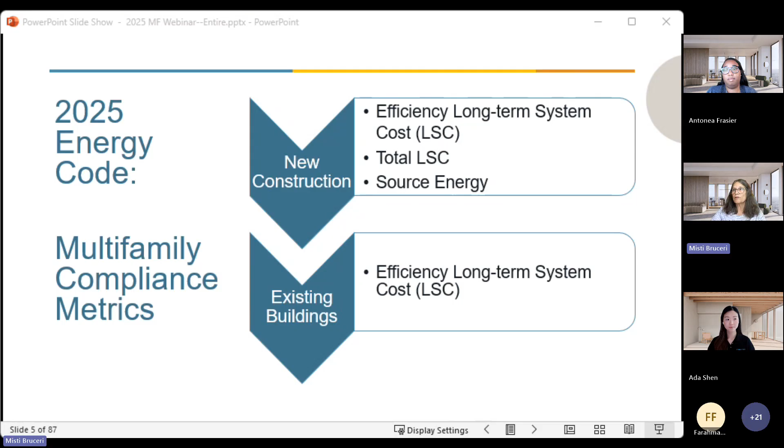I'm going to get started with a high-level review of some really basic information about the Energy Code, just to set the table for us and get us ready for the discussion. Just going to quickly cover the basics.

There are 3 metrics for new construction in the Energy Code this cycle. There were last time as well, but in this cycle we've switched the TDV metric to what is termed LSC, or the long-term system cost. That LSC metric is the CEC's projected value of the cost to the whole California energy system over about 30 years, so it's what we often term a societal cost. That's how the CEC looks at compliance and energy code development—they look at the whole societal cost, not just the cost to an individual.

For new construction, there are 3 metrics. 2 of them are the LSC. The LSC has 2 components. The first is the efficiency LSC, which basically covers the building envelope, the energy used to provide heating and cooling, water heating, lighting, and ventilation—all of those efficiency functions. The second component is the total LSC, which also includes the impacts from both PV and renewables, and any kind of demand response or demand management activities.

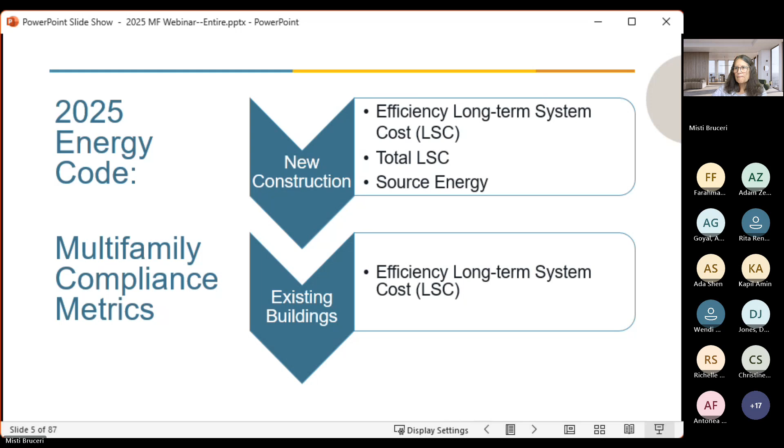When we do these analyses, we use prototype building designs. Those prototype designs are actually created by the DOE, and they are also used by the CEC when they set the state code requirements. So we use the same designs, and that helps us stay consistent with the compliance metrics and compliance structure.

For our study, both the new construction and alterations study use what the CEC terms a high-rise multifamily building. The CEC has a demarcation between low and high rise at 3 and 4 stories—3 stories and below is low rise, 4 and above is high rise. It's actually more like what would be considered a mid-rise building: a 6-story building, 5 stories above ground, 1 with non-res on the ground floor, and then 4 stories of residential.

For the low rise, we actually use 2 different prototypes. For the new construction, the low rise building is a 3-story design we call a loaded corridor design. What that really means is it's one big building and you enter your dwelling units from the interior—there are hallways with doors, kind of like a hotel.

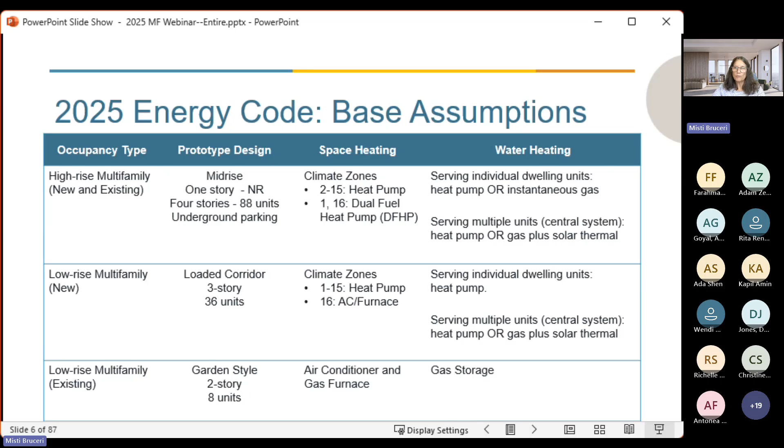We talk about this quite frequently, but the question does come up fairly regularly. A lot of folks are not used to dealing with the energy code - they may work with the building code in its entirety, but not the energy code. In order to amend the energy code, the amendment has to be cost effective, and so we do the studies to meet that legal requirement. That is the main reason we do the studies.

However, they're very valuable for a lot of other reasons. Even if it's not a legal requirement, it gives us an idea of where those opportunities are, what the options are, what might be some better pathways, and where we might run into some difficulties or challenges. It gives us much more information so that we can understand and communicate the potential impacts of one of these policies. It also helps us identify where opportunities might be available specifically locally that may not be available statewide, because we do the studies across the whole state in each climate zone. So it gives us a lot of different information that is really valuable as you're developing a policy. While they take a while and are fairly complex and a little tricky to get through, they are very valuable additions and good resources to use.

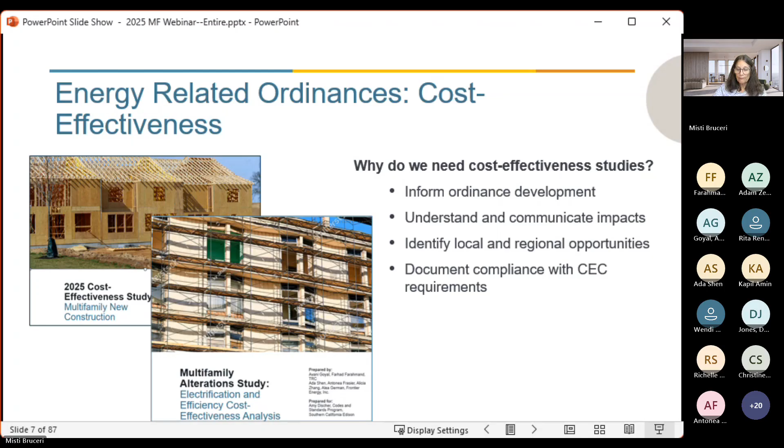With that, I'm going to turn things over to Ada Shen and Antonea Frasier from Frontier to give us a review of the analysis of the multifamily new construction.

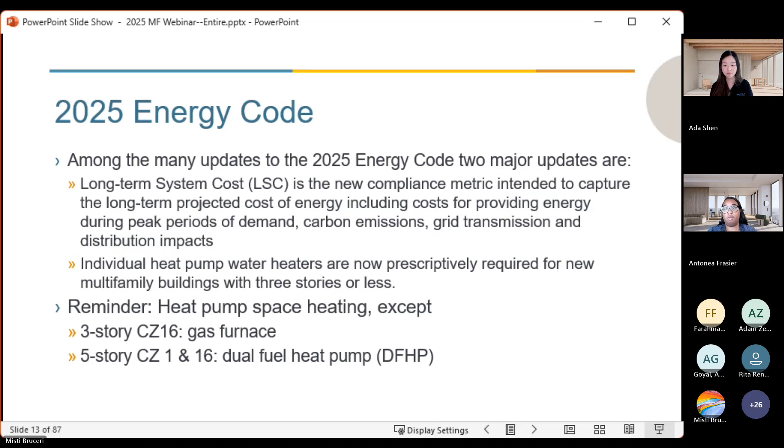Given this context of the energy code, we'll talk through our methodology for the cost effectiveness analysis. On a high level, this analysis builds on the 2022 REACH code analysis to provide continuity.

We'll be talking about two packages. First is what we're calling the electric heating package, referring to electric water heating and space heating where applicable. This is effectively an electric water heating measure in most climate zones, because the heat pump space heater is already prescriptively required except in climate zones 1 and 16, as described previously.

Second is the mixed fuel efficiency and increased solar thermal water heating package, which we'll describe in further detail later on. The team uses the 2025 prescriptive requirements as the starting point to set the baseline, and the analysis uses CBECC 2025 1.0 version, the compliance software for California. Cost effectiveness is evaluated over a 30-year analysis period.

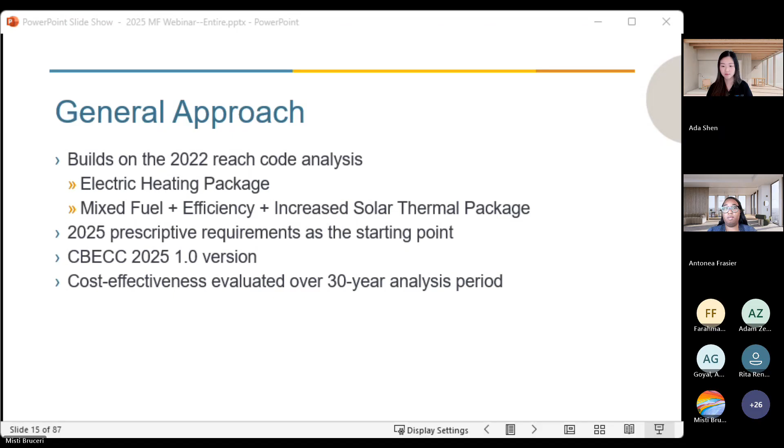Next, we have the two prototypes we'll be evaluating in this study: the 3-story loaded corridor and the 5-story mixed use prototype. Combined, these two prototypes are estimated to represent 91% of new multifamily construction in California. Though the 5-story includes commercial spaces, the energy savings and cost effectiveness in this analysis will only pertain to the residential portion of the building.

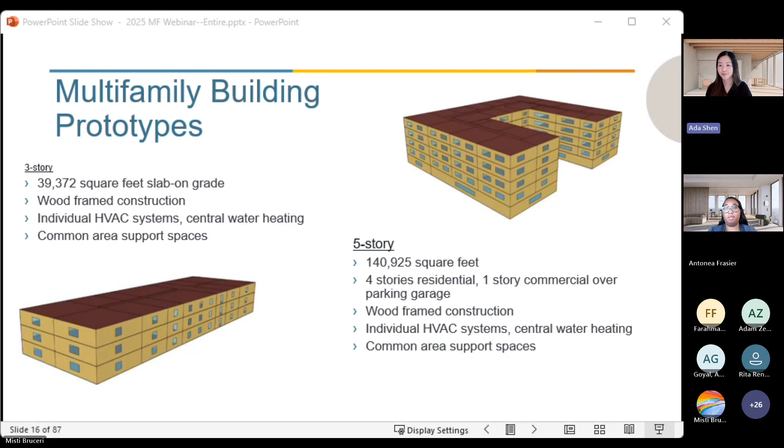Next slide. Our analysis baseline uses the 2025 prescriptive requirements. This is the heat pump space heater, except 3-story in climate zone 16, and in the 5-story climate zone 1 and 16, which uses a dual fuel heat pump.

We assume a gas central water heater with solar thermal. So buildings that install gas central water heating are also required to install solar thermal water heating systems, with 20% solar savings fraction in climate zones 1 through 9 and 35% solar savings fraction in climate zones 10 through 16.

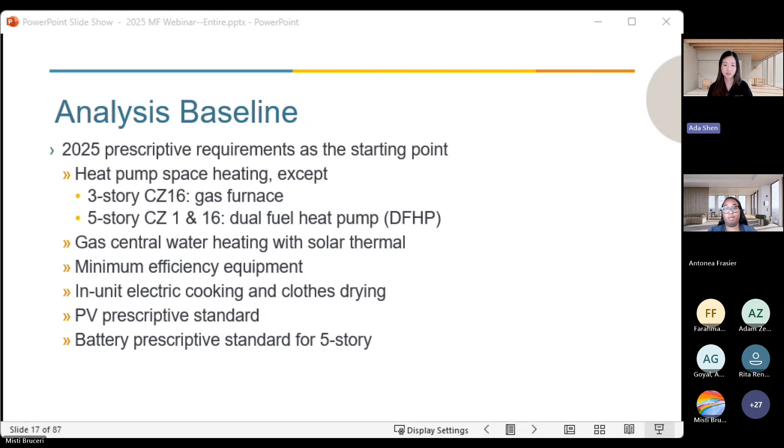The team assumes minimum efficiency equipment so as not to violate federal preemption, and assumes in-unit electric cooking and clothes drying. The prescriptive solar PV required, as well as the prescriptive battery for 5-story, is assumed in our analysis baseline.

Now we'll talk a little bit more in detail about these upgrade packages. First is electric heating, which is effectively a central heat pump water heater measure in most climate zones.

As mentioned, there's flexibility to install either a heat pump water heater or a gas water heating system, and the baseline will follow the proposed equipment. So, for example, if you install a central heat pump water heater, you're compared against a heat pump water heater and not the gas system.

In this measure, because the central heat pump water heater is not federally regulated, the proposed central heat pump water heater is higher efficiency equipment than the baseline heat pump water heater, which assumes fairly low efficiency. But to quantify cost effectiveness, we compare this measure to the gas system, in order to quantify the benefit of this measure in comparison to the gas system.

And for climate zones that do not have a heat pump space heater already prescriptively required, this package also includes the heat pump space heater. So in the table highlighted in red are the climate zones and prototypes where this would be an upgrade.

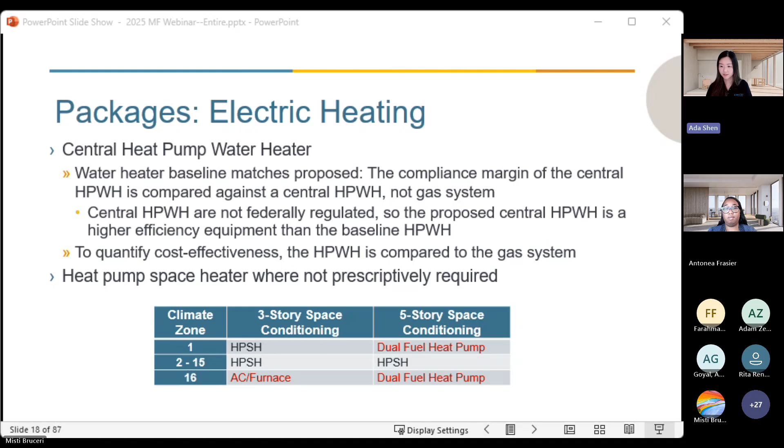Next slide. So the second package is mixed fuel with efficiency and increased solar thermal. In this table, we have the efficiency and solar thermal measures assumed for each climate zone. This includes a higher efficiency window measure, reducing the U factor from 0.28 to 0.24, verified low leakage ducts in conditioned space, and upsized solar thermal systems. You'll notice in climate zones 1 through 9 it's a 35% solar savings fraction system, and in 10 through 16 it's a 50% solar savings fraction solar thermal water heating system.

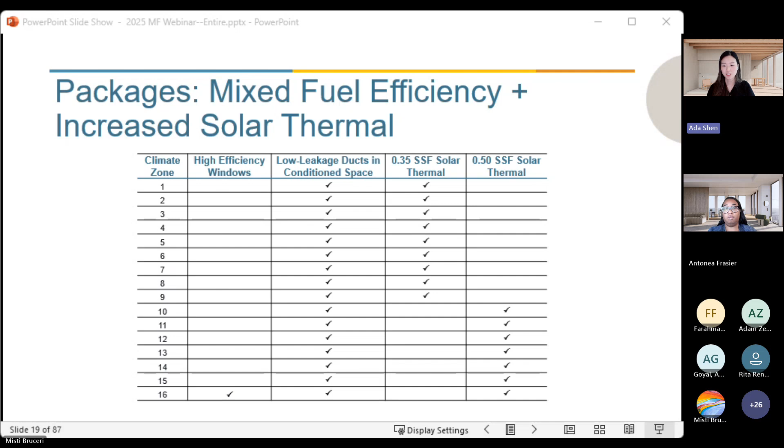Next, just some assumptions and caveats. The focus is on dwelling units and common area spaces only, so commercial spaces are not evaluated. The utility costs are based on residential rates, and the impacts are combined across all residential uses. So the energy use is from all the residential spaces. For example, the electricity will include the units and also the residential common area spaces. And utility costs are based on NEM 2.0.

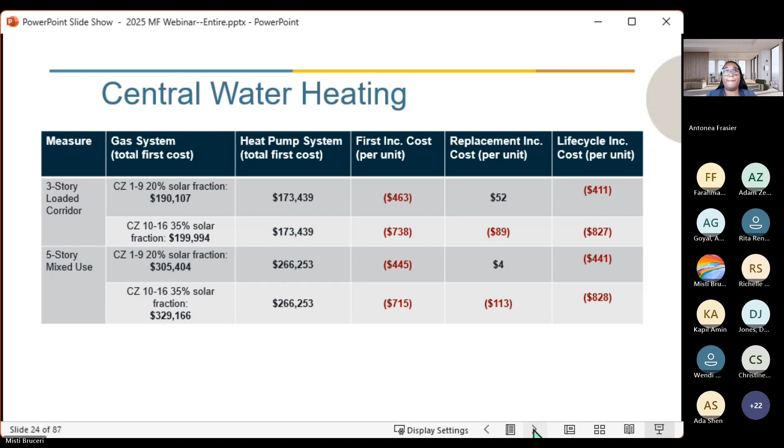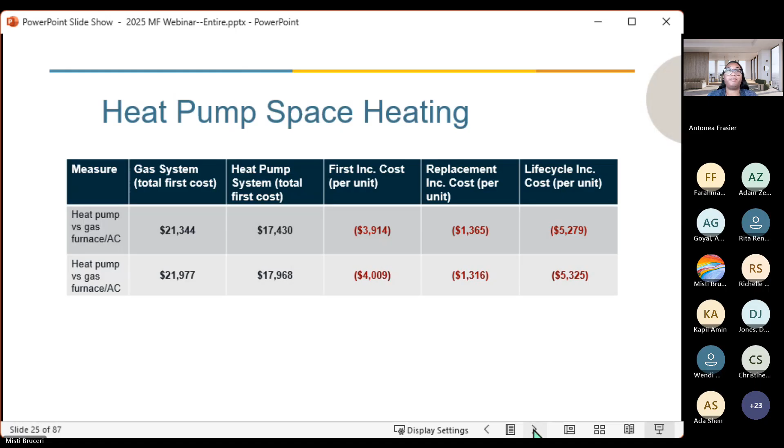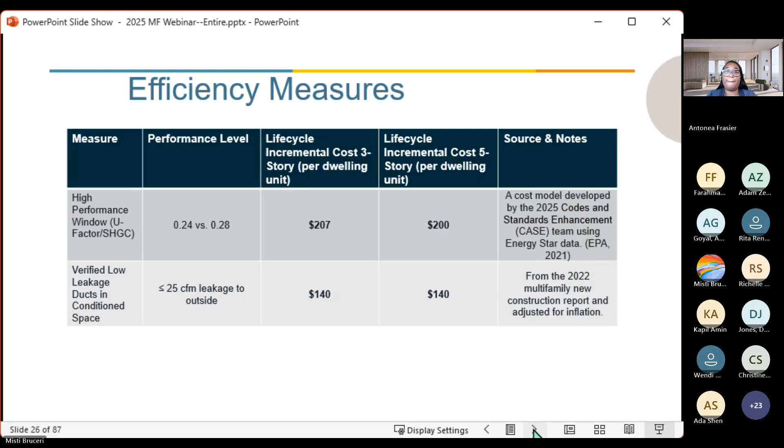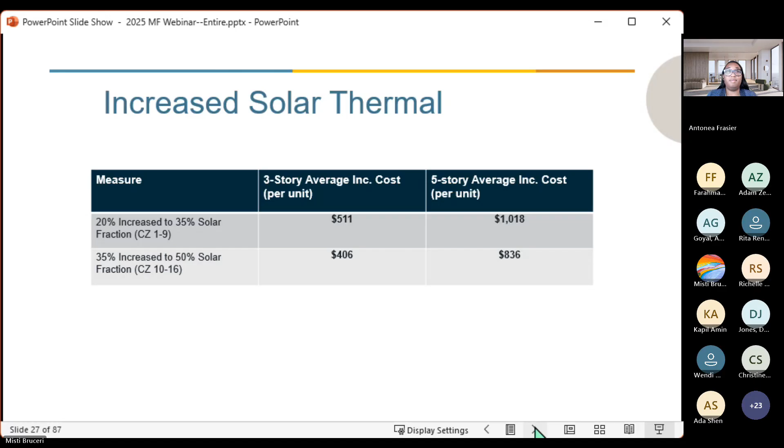Next, I'll move into the results and walk us through how each of these packages performed.

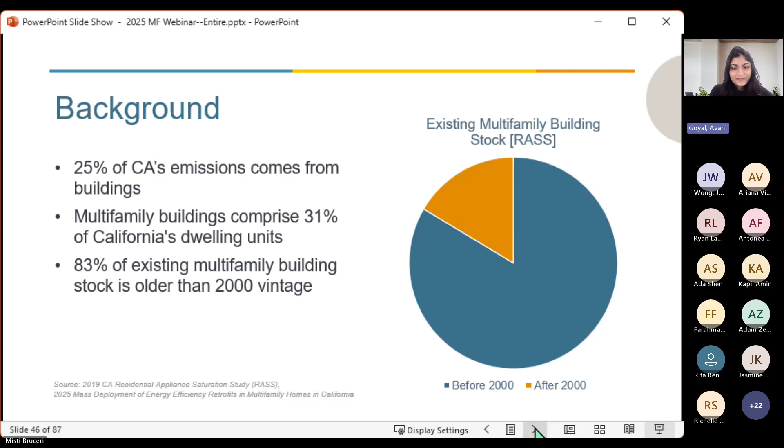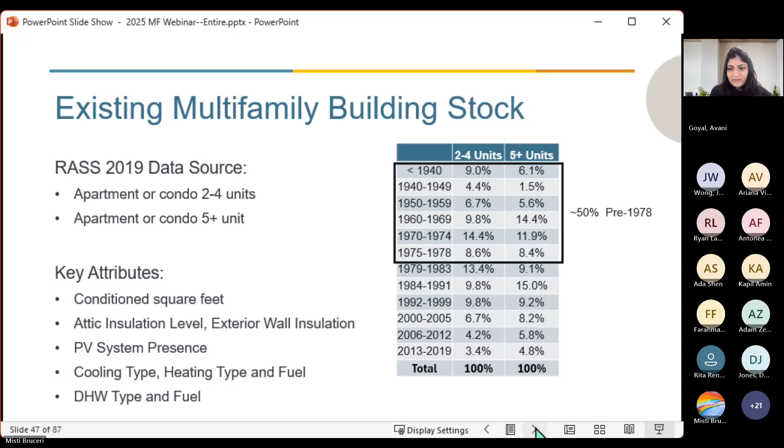There would be some retrofit turnovers that would have happened since then, but this is the as-built date. Key attributes that we evaluated as part of the building stock analysis were the size of the buildings, the dwelling units, attic insulation level, wall insulation, whether there is solar PV or not, the cooling systems, heating systems, the types, and the fuel categories, as well as for the water heating, what kind of systems and the fuel types they have. We'll later talk about how this data also informed which vintages we selected and why.

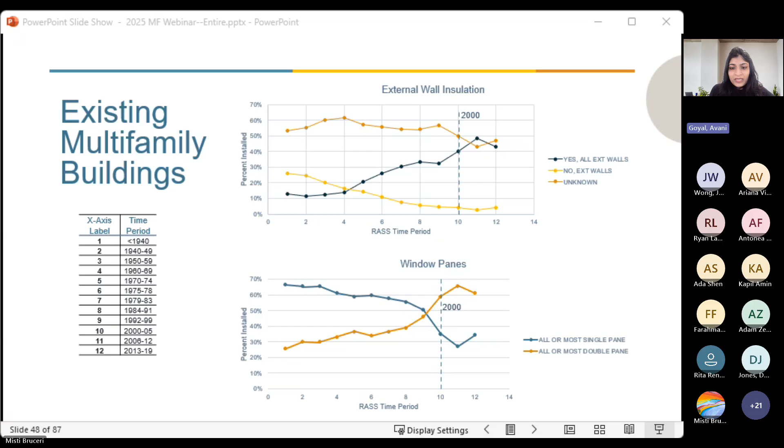Some key trends that we observed includes the first graph, which is wall insulation. It shows the trend over time, 0 to 12, going from the 1940s to the 2010s. As we can see, during the 1960s, which is number 4, external wall insulation begins to see rapid adoption, which keeps increasing, shown by the dark blue curve, which keeps continuing. And as of 2000, we can see that there is more insulation and much fewer buildings without one.

The second graph shows window types installed over time. The prevalence of single pane windows, shown in blue, declines over time, and the prevalence of double pane windows, shown in orange, shows a rapid increase, with the trend being reversed around and after the 2000s.

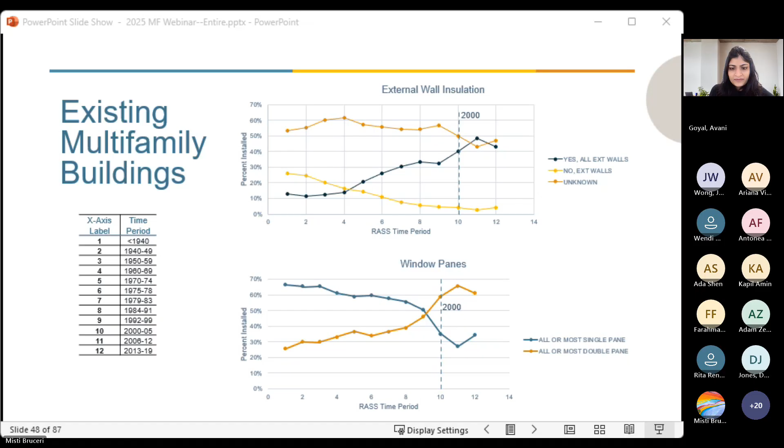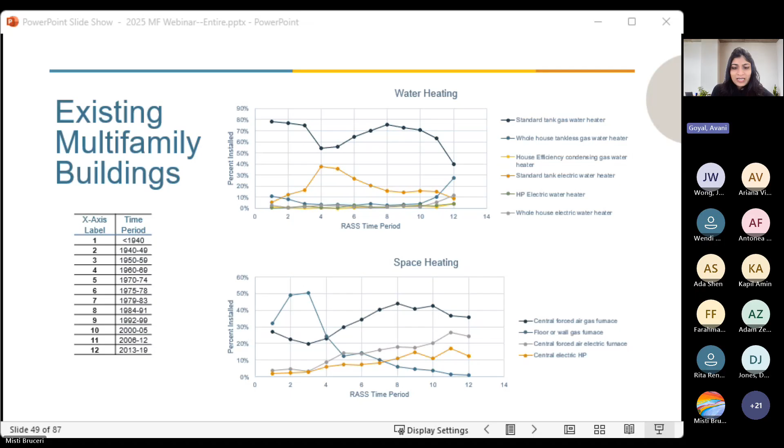The second graph talks about space heating equipment installations over time. Gas furnaces have the highest rate of installation for the majority of the recorded time periods, beginning in the 1970s, with floor or wall furnaces rising in popularity in the 1940s to 60s. However, we assume that even if they were installed in the 60s, they would have been replaced with a gas furnace by now. Therefore, the team assumed a gas furnace and AC in both the vintages selected for the analysis.

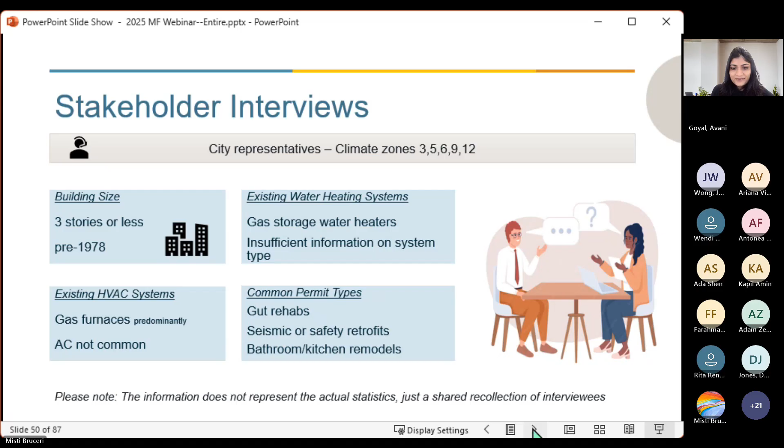I'll quickly talk about some of the barriers identified by the interview participants as it pertains to multifamily alterations. The cost effectiveness study has been scoped keeping these barriers in mind and trying to address them, especially the economic feasibility, where there is concern regarding increased retrofit costs, utility bills, and how it impacts cost effectiveness when incentives or federal credits are declining.

There is also limited awareness about the benefits, the GHG savings potential, or associated electrical upgrade requirements and permit requirements. The study also discusses some of the concerns related to technical feasibility, what it entails regarding concerns with limited space, accessibility, any electrical or plumbing updates required, or insufficient panel capacity.

There are other concerns reported related to code adoption, such as permit documentation, incentive availability, information, financing between tenant and owner, code development, and having enough resources, which would not be directly covered by the study but definitely kept in mind as we think through policy options.

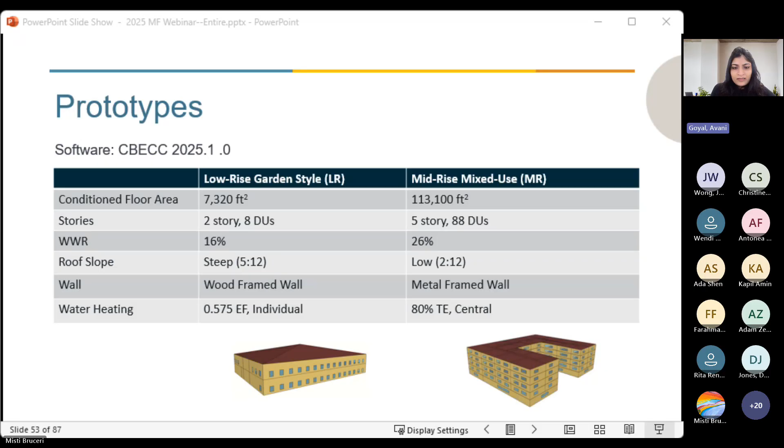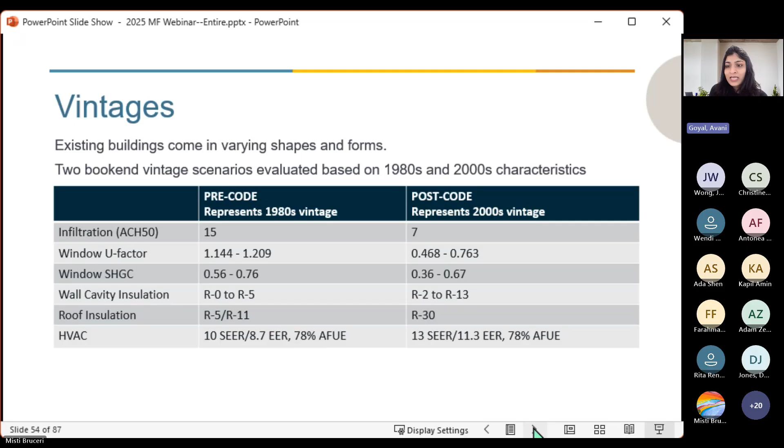Here as well, we've tried to cover 2 different levels. The pre-code will have the worst assumptions for infiltration, windows, window U-factor, SHGC, wall cavity insulation, roof insulation, and HVAC efficiencies. So there is variation between the two vintages that are covered.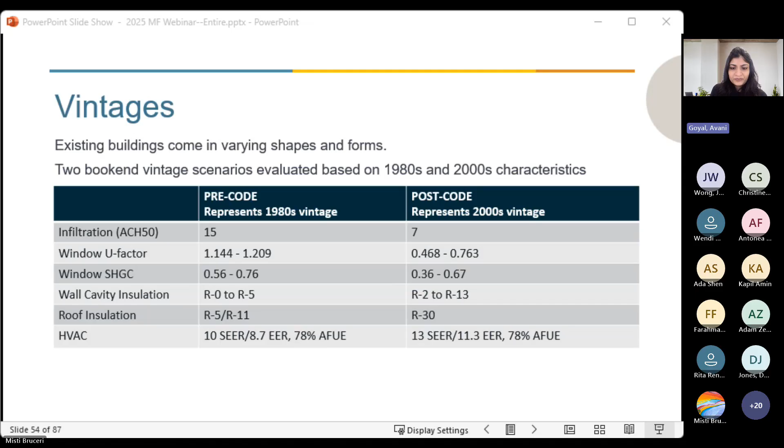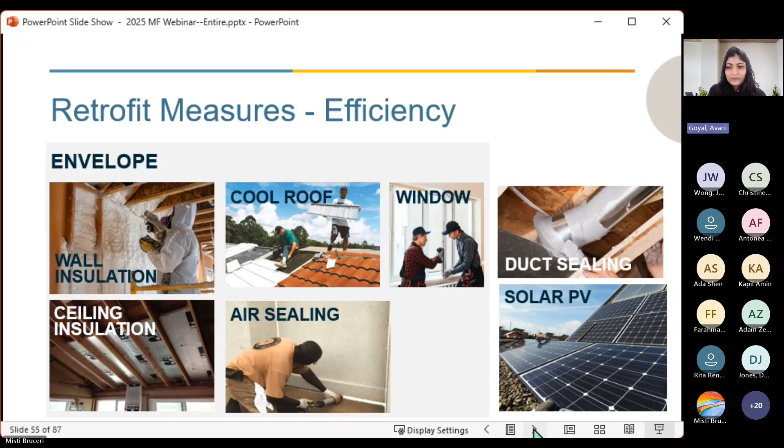From a large list of measures that we considered, we narrowed down and selected a list including wall insulation, cool roof, window replacement, ceiling insulation, air sealing, duct sealing, duct insulation, and solar PV, based on their savings potential for the assumed baseline prototype characteristics. This may not be an exhaustive list, but these are the measures that showed the most potential for energy savings and some cost effectiveness.

We also have equipment replacement measures for the space conditioning system and for water heating. For water heating, we have both individual and central, based on the two different prototypes. Both federal code minimum and market minimum efficiencies have been evaluated for cost effectiveness.

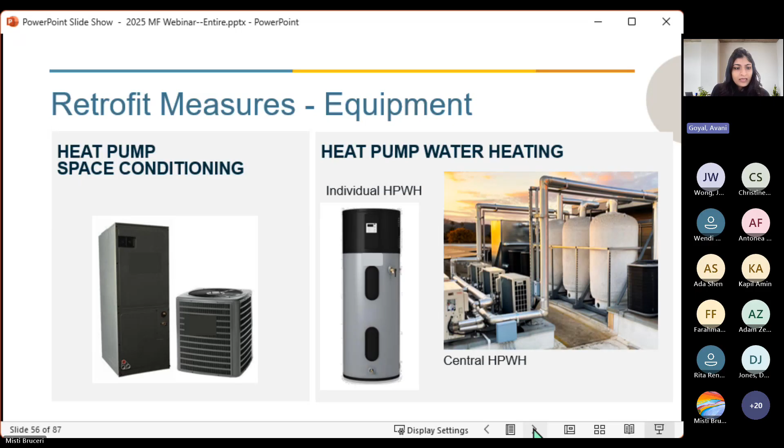I'll pass it on to Ada to talk about the costs and the cost effectiveness results. Thanks, Avani. Go to the next slide.

The team worked with a contractor to detail cost estimations for the prototype specific to the study, as well as measures evaluated, some of which the contractor had experience with. We also utilized the Opinion Dynamics study in collaboration with the tech program, where they developed an incremental cost study to understand the cost difference in installing a heat pump space heater or heat pump water heater in comparison to the AC plus furnace or gas water heater, respectively.

They had different phases. We're utilizing costs from phase 1, which were costs obtained in 2023, and phase 2 costs obtained in 2024. The report came out in 2025, so fairly recent costs.

We're also using the 2025 multifamily envelope CASE report to inform some measures, including windows and cool roofs. The team also utilized costs from a contractor survey Frontier performed in the summer of 2023, and accounted for inflation accordingly. Finally, LBNL's Tracking the Sun study informed the PV and battery cost assumptions. So the team really worked hard to ensure assumptions were understood and applied appropriately.

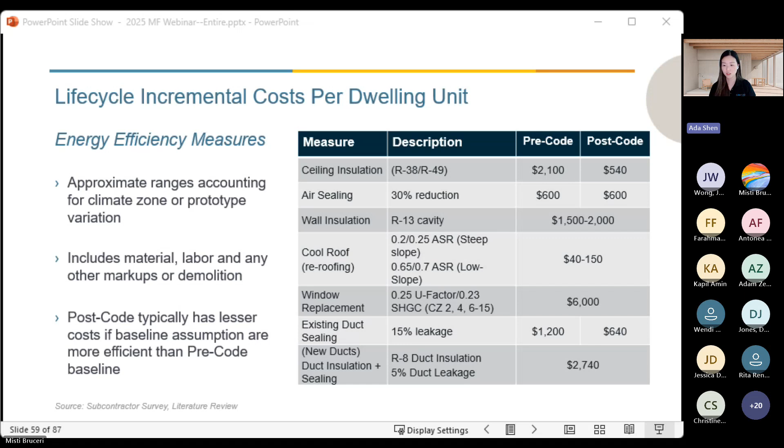Next slide has the heat pump incremental costs. Costs vary by climate zone due to the size of equipment. The example of cost shown in this slide would be for climate zone 3, just to give an idea.

For the heat pump space heater measures, these costs come from an average of the cost estimator we worked with, as well as the phase 1 Opinion Dynamics tech incremental cost study. Note that the first and lifetime incremental cost for the heat pump space heater is negative, meaning the furnace and AC costs more than the heat pump space heater. But for the high efficiency heat pump space heater and VCHP, it costs more than the furnace AC.

So again, this is at time of replacement. At the time of burnout of your AC and furnace, you would replace it with a heat pump space heater. So the cost is the incremental cost above the furnace AC.

Similar situation for equipment replacement of water heating. The 2-story assumes an individual water heater, while the 5-story assumes a central heat pump water heater. For the individual water heater in the 2-story, these costs come from both the cost estimator as well as the phase 2 Opinion Dynamics tech incremental cost study.

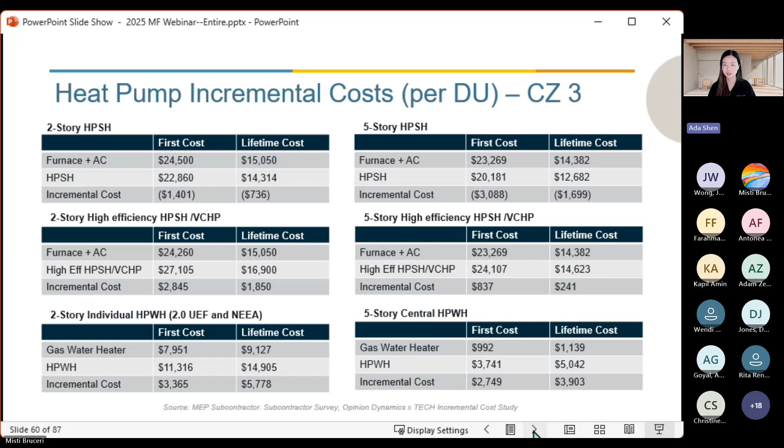In the next slide, we'll move into cost effectiveness methodology. I'll go through this quickly since the methodology is very similar to multifamily new construction. Once again, we have on-bill and LSC metrics for cost effectiveness, over a 30-year evaluation period. Where equipment needs to be changed out, we include that in the cost, and we present results in net present value, which is the present value of the lifetime benefit minus the cost.

Once again, same slide: we're using the same LSC escalation rates as we did in multifamily new construction, so we won't stay here too long. If you have questions, feel free to drop them in the chat. This is developed by the CEC, and it's what's used in the compliance software. We use it to estimate the 30-year on-bill cost effectiveness, based on the assumption of how much the utility rate will increase year over year.

These are the utility rates that we applied for the climate zones, based on the predominant IOUs serving the population of each zone, and where some zones are evaluated with multiple utilities, where service territories cross over. This is the same as multifamily new construction.

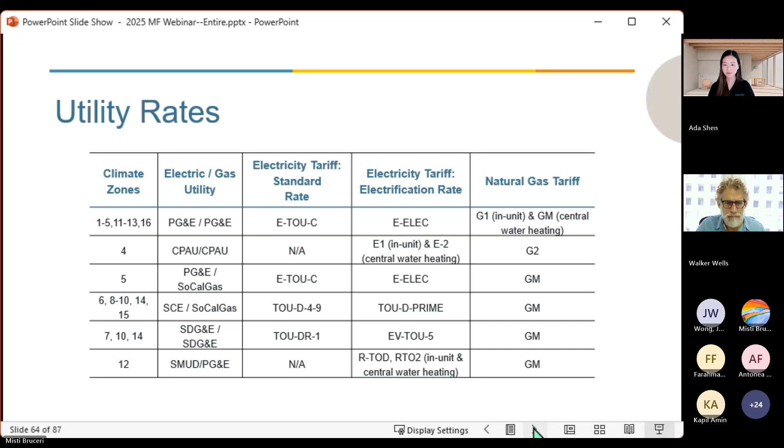Next slide. I know there's a lot of information and the font is small, but just wanted to paint some broad strokes. In the rows are the climate zones, and in the columns are different measures evaluated. This is the LSC cost effectiveness for the low-rise pre-code, focusing on the efficiency and PV measures. Green is cost effective, red is not, with somewhat of a gradient. Just wanted to highlight some of the opportunities here.

There's opportunities for PV in existing buildings. I did want to note that this analysis was done with NEM 2.0 because that's what was available at the time of developing this analysis. So we do expect the magnitude of the cost effectiveness to decrease with the virtual net billing tariff, but there is a healthy buffer here, so it seems like there should still be some good opportunity there.

In adding R13 insulation to an old building that has a fairly low cost, and it's an unintrusive way to improve the envelope, and it does show 30-year cost effectiveness in many climate zones. There's also opportunities for air sealing to reduce the infiltration.

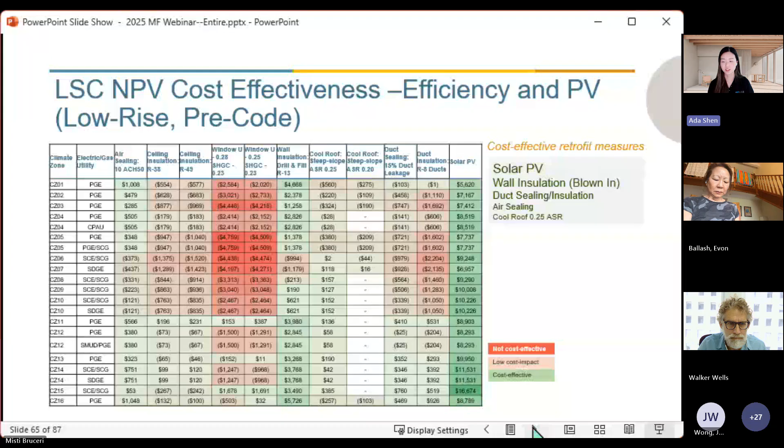And it has cost effectiveness in climate zones outside of the more mild Southern California area where there isn't quite enough opportunity for energy savings to offset the cost. However, there are opportunities for cool roofs in the Southern California region, and this would be increasing the aged solar reflectance from 0.20 to 0.25 at time of roof replacement.

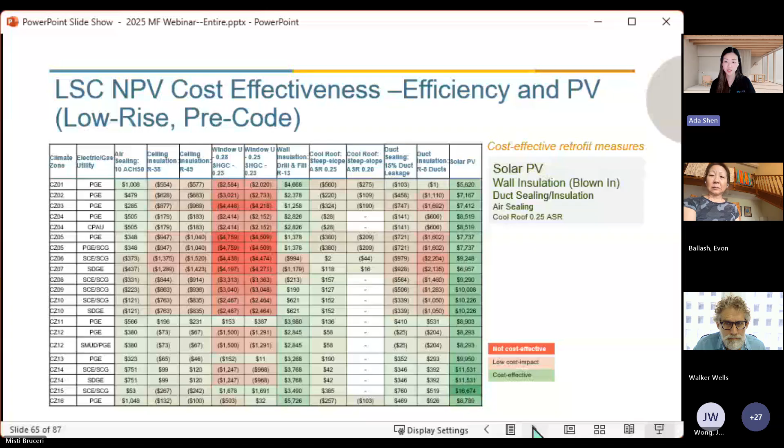Next slide. Similar trend, this is the 5-story pre-code. Similar opportunities of PV, air sealing, wall insulation, windows in some of the climate zones, and cool roofs.

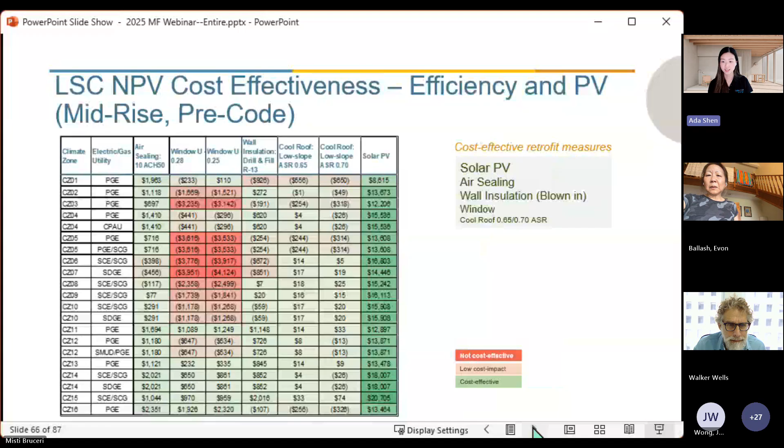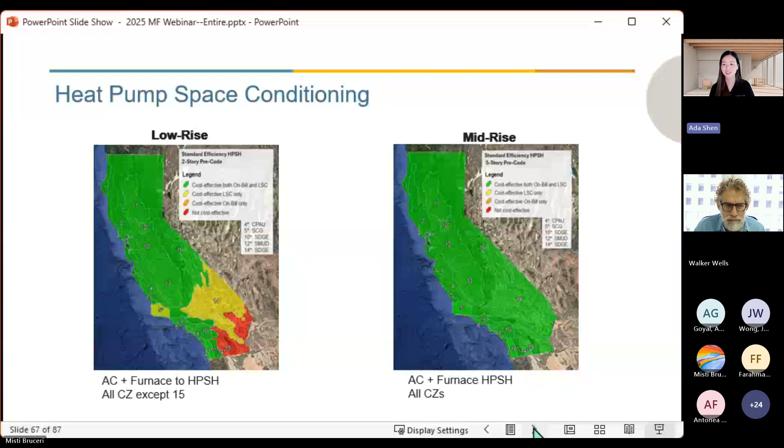On the left we have the low rise, and on the right is the mid-rise prototype, both in the pre-code vintage. Going from an air conditioner and furnace to a heat pump space heater is cost effective in at least one metric for all climate zones except climate zone 15 in the low rise. In the mid-rise, the heat pump space heater is on bill, LSC, and both on bill and LSC cost effective in all climate zones. Next slide.

I wanted to note that there is a wide range of potential existing condition scenarios, and we're aware that heat pump water heater equipment will require more space and venting. So there's a caveat here that there are some retrofit costs included, but not significant changes, such as relocating the hot water plant or large structural changes.

So I want to note that there is opportunity here for further work to better understand what is the likelihood of needing to relocate your entire water heater system and the associated costs. And so it could be reasonable to add an exception if relocation costs are significant, given the uncertainty and range of possible existing conditions.

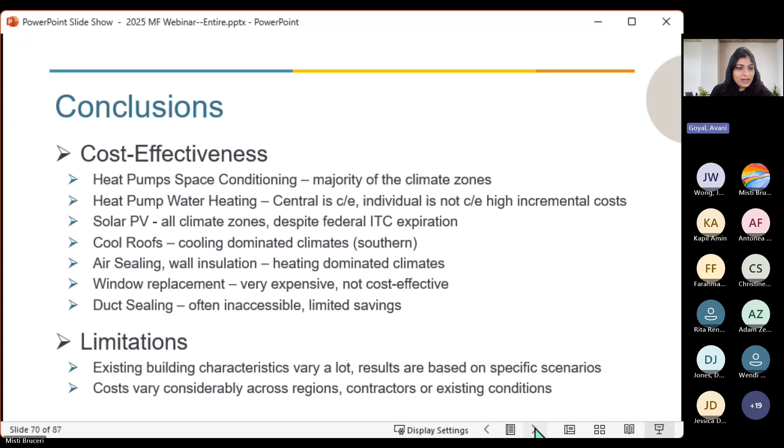Now I'll hand it back to Avani for some conclusions. Okay, yeah, I think we pretty much covered all the information.

So I want to summarize our conclusions on cost effectiveness. The heat pump space conditioning is cost effective in the majority of the climate zones. The incremental costs have been pretty competitive or very similar, and hence we can see the cost effectiveness. For the heat pump water heating, the central is shown to be cost effective with the caveats that Ada shared, whereas the individual is not cost effective given the high incremental costs.

Solar PV is also cost effective in all the climate zones, despite the expiration of federal incentives, although this does not account for the newest net energy metering updates with NBT. Cool roofs is one of the low hanging measures, and it's cost effective in the cooling dominated climate zones. Air sealing and wall insulation have been largely cost effective in many heating dominated or moderate climates.

Window replacement measure is very expensive and hence not cost effective anywhere. Duct sealing measure is often inaccessible given the location. The only places where we were able to evaluate was low-rise building with attic. So it has limited savings potential given the accessibility and what the existing duct location looks like.

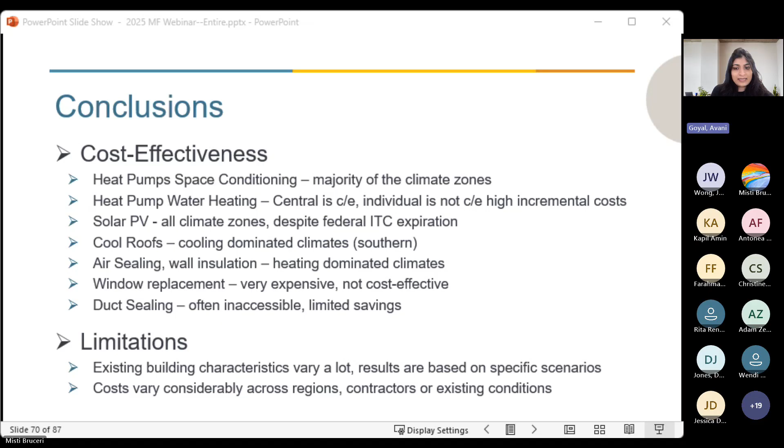We'll loosely talk about some reach code pathways this study can support. Based on our results, it seems we can do time of replacement with AC to heat pump as a cost-effective measure, or gas water heater to heat pump water heater, especially for central systems, since it's shown to be cost-effective. However, time of replacement also requires a gas equivalent pathway, so it will depend on climate zone to climate zone where we're able to create an energy equivalent gas pathway to meet similar performance for a time of replacement code.

For the flex path type of code, there is limited applicability, just because there aren't many measures which are cost-effective, and it may not give a lot of flexibility in that area. It could also support some specific measure-related reach codes like solar PV, cool roof, or air sealing, or for specific climate zones there are individual measures that could be cost-effective and used as a specific prescriptive reach code option.

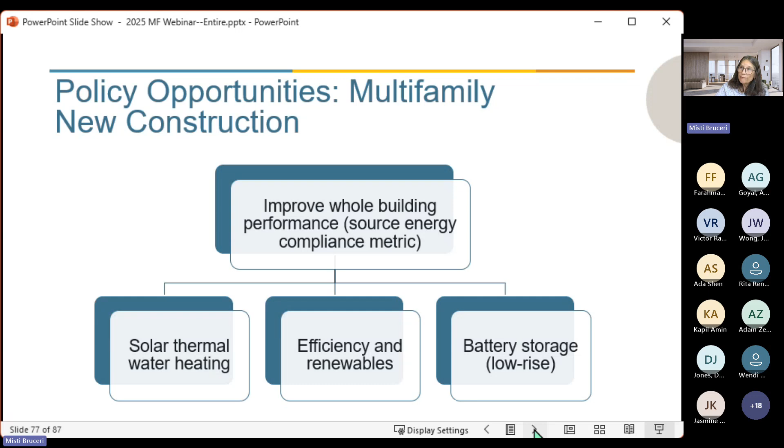Lastly, there could be some requirements for efficiency and renewables based on some of those cost-effective measures. That could be something where you do just a prescriptive requirement—for example, when you re-roof, you need to do a cool roof. Something like that, or it could be something where we combine measures and try to come up with something that provides more flexibility for people. So something more structured—if we get to flex path, it would be a mini flex path. We're looking for options on how we might combine some things and mix and match to come up with more options for people, so it's not so limited.

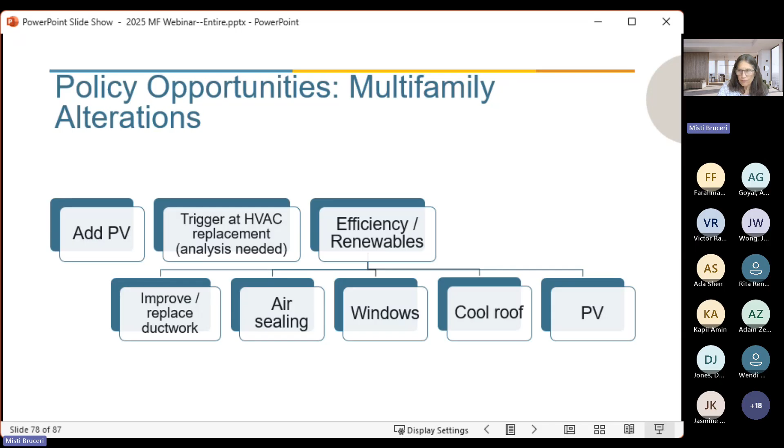In addition to that, we do have the Cost Effectiveness Explorer. The Explorer team is working right now to get those results imported into the Explorer. I highly recommend checking it out if you haven't—it really helps interpret the results of the report for your jurisdiction, breaking everything down so you're only looking at results for your jurisdiction. It also lets you play around with some assumptions about how things might be impacted. Highly recommend it if you have the opportunity. It's actually a great tool with other features as well.